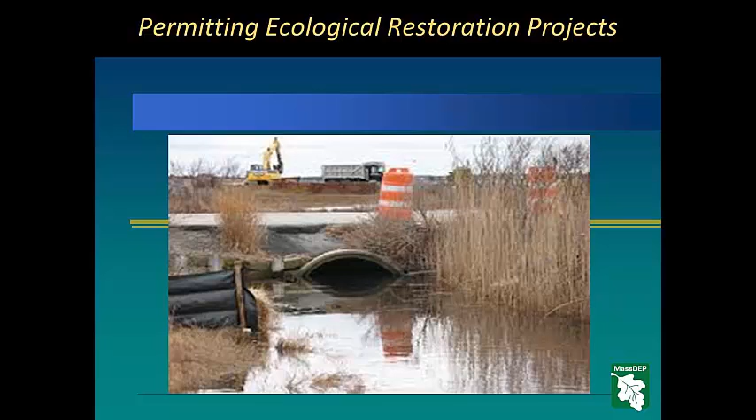Hello and welcome. Massachusetts Department of Environmental Protection is working to develop adaptive strategies to address climate change and integrate them into the Massachusetts Wetlands Protection Act regulatory framework. One such effort is to encourage wetland and restoration projects that further ecological connectedness and resilience, adaptation to sea level rise, and flood and storm damage protection for private property and public infrastructure.

In October of 2014, MassDEP incorporated a general permit into the Wetlands Protection Act regulations that is designed specifically to ensure that restoration projects will be permitted. This presentation explores the regulatory additions implemented for the ecological restoration. It looks at what defines an ecological restoration project and what type of projects can be permitted as ecological restorations. And finally, we will walk through each step of the permitting process as an example.

Several new additions enhance the regulations for ecological restoration projects. There are two new definitions added to 310 CMR 10.04. One is a definition of an ecological restoration project, and the second, a definition for ecological restoration limited projects. We've added 4 new sections for ecological restoration permitting in 310 CMR 10.11 through 310 CMR 10.14. New sections have been added to the coastal and inland limited projects regulations that deal with ecological restoration limited projects specifically. These can be found in 310 CMR 10.24(8) and 310 CMR 10.53(4).

The Wetlands Protection Act regulations now define an ecological restoration project as a project whose primary purpose is to restore or otherwise improve the natural capacity of a resource area to protect and sustain the interests identified in the Wetlands Protection Act when such interests have been degraded or destroyed by anthropogenic influences. Ecological restoration limited projects are those that specifically meet the eligibility criteria outlined in 310 CMR 10.24 Section 8 of the Coastal General Provisions, or the eligibility criteria outlined in 310 CMR 10.53 Section 4 of the Inland General Provisions.

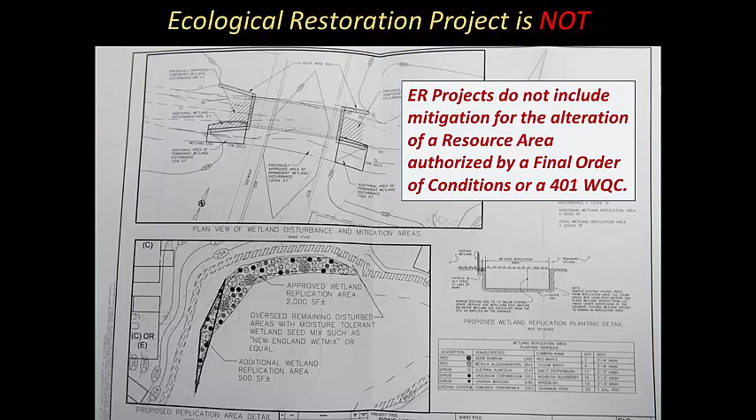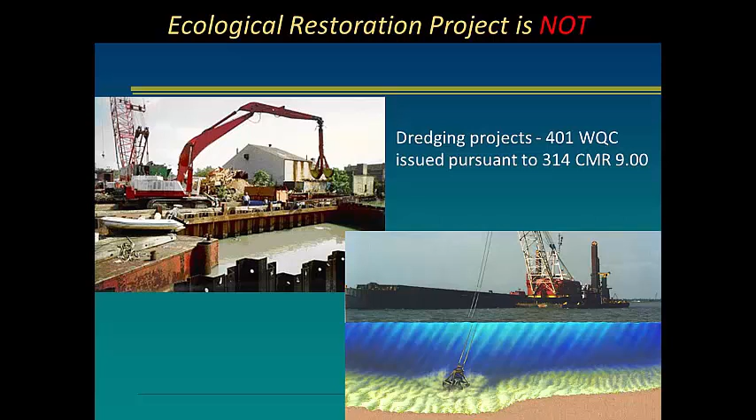Ecological restoration projects do not include mitigation for the alteration of a resource area authorized by a final order of conditions or a 401 water quality certificate. Ecological restoration projects do not include dredging projects for which a 401 water quality certificate has been issued pursuant to 314 CMR 9, unless the project is by definition an ecological restoration. Ecological restoration projects do not include natural disasters or acts of God or enforcement actions requiring restoration.

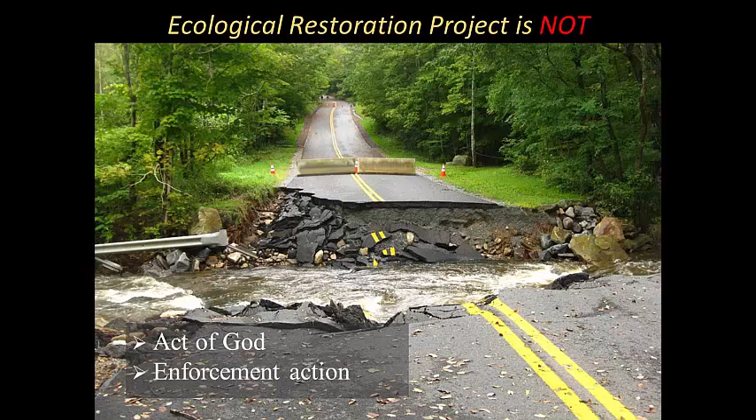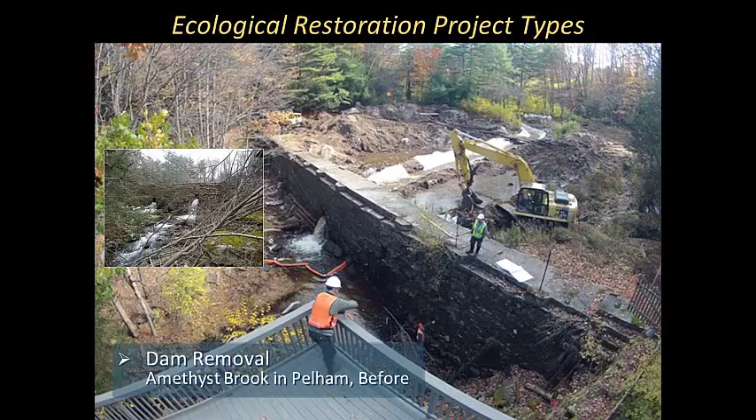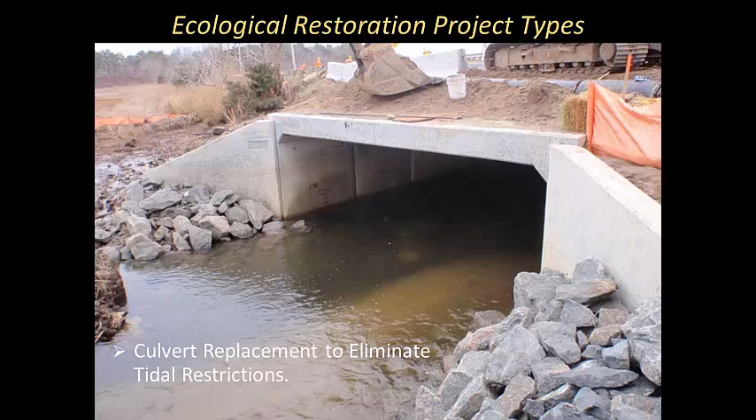There are several advantages for a wetland permit applicant to obtain an ecological restoration general permit. The Ecological Restoration General Permit, also known as the Restoration Order of Conditions, provides advantages for both conservation commissions and wetland permit applicants. For example, the general permit is a faster and more predictable permitting process because it identifies key issues for review, is front-loaded so all necessary information is already included with the notice of intent at the time of submittal to the Conservation Commission. It doesn't require a 401 water quality certification unless the project involves dredging. The restoration order of conditions also includes standard template conditions for each of the specific ecological restoration project types.

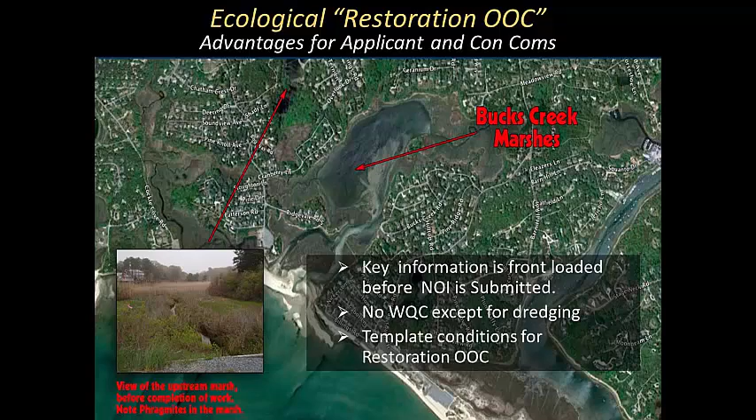Another advantage of applying for an ecological restoration general permit includes an exemption from Massachusetts Environmental Policy Act, or MEPA review, unless they are publicly funded. However, a notice still needs to be published in the Environmental Monitor before submitting the Notice of Intent to the Conservation Commission. Ecological restoration projects that meet the requirements of 310 CMR 10.12(1) and (2) are exempt from conducting a wildlife habitat evaluation under 310 CMR 10.60.

It's important to note that there is an underlying principle for ecological restoration projects. It is understood that these kinds of projects may result in the temporary or permanent loss of a resource area or the conversion of one resource area to another resource type when that loss is fundamentally necessary to achieve the project's ecological restoration goals.

We've developed a flowchart for the ecological restoration permitting process to emphasize its structure. The visual outline that a flowchart provides can help to clarify our understanding of the permitting process for restoration order of conditions and for ecological restoration limited projects. We'll use the flowchart to walk through each step of an NOI filing.

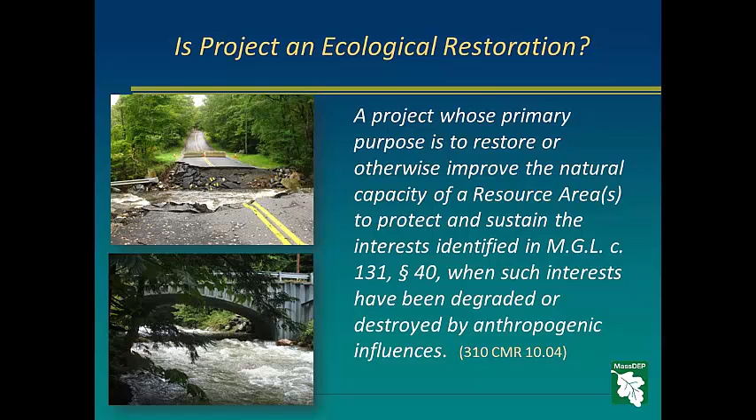First, to determine which permitting process a notice of intent should follow, the applicant must first decide if the project is an ecological restoration. This question can be answered by comparing the project to the regulatory definition found in 310 CMR 10.04, which defines an ecological restoration as a project whose primary purpose is to restore or otherwise improve the natural capacity of a resource area to protect and sustain the interests identified in the Wetlands Protection Act when such interests have been degraded or destroyed by anthropogenic influences. If the project does not meet the definition of an ecological restoration project, as defined in 310 CMR 10.04, then the NOI is a regular wetland filing and not an ecological restoration project.

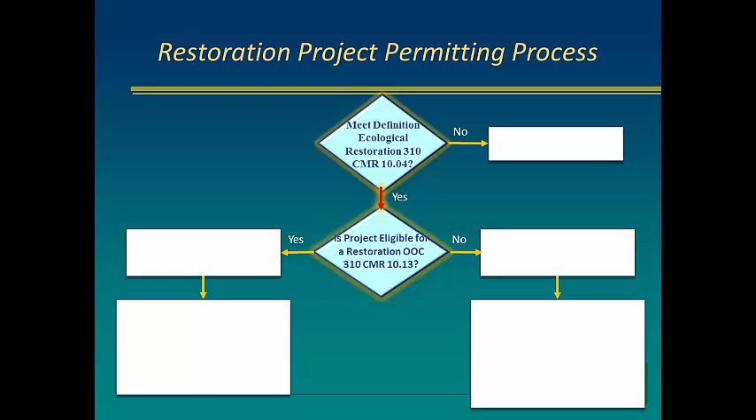In that case, the applicant should file the Notice of Intent using the regular WPA Form 3 Notice of Intent. If the project meets the regulatory definition of an ecological restoration, then the NOI is an ecological restoration project. The next step in the permitting process is to determine if the ecological restoration project is eligible for a restoration order of conditions or whether it can be permitted as an ecological restoration limited project.

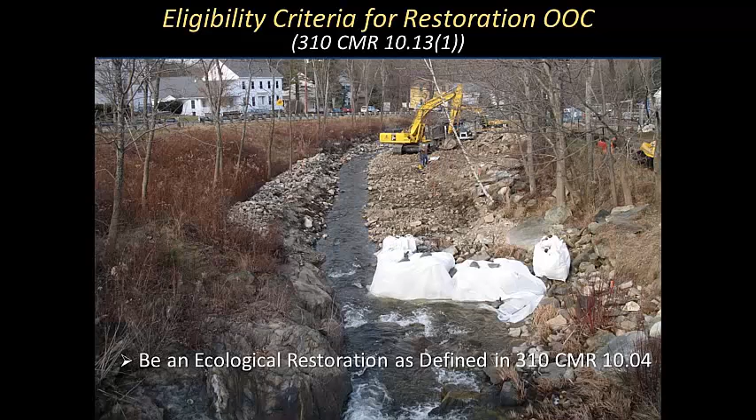So what criteria allow the project to be eligible for a restoration order of conditions? First, the project must be an ecological restoration project as defined in 310 CMR 10.04 as we've just discussed. It must further at least one of the interests of the Act. To the maximum extent practicable, the project must avoid and minimize adverse impacts to resource areas and other interests of the Act, and use erosion and siltation control best management practices to minimize construction impacts.

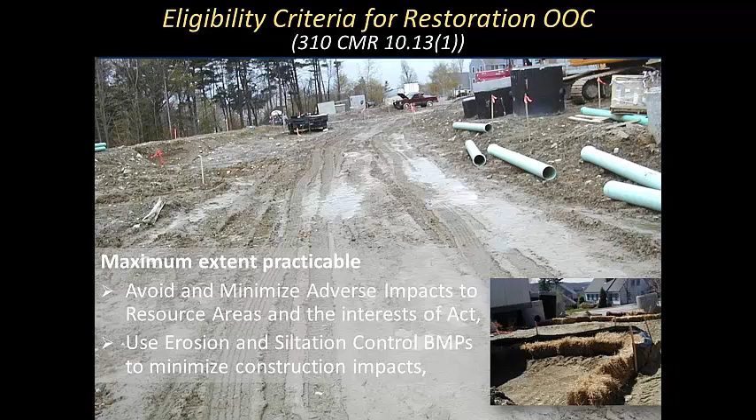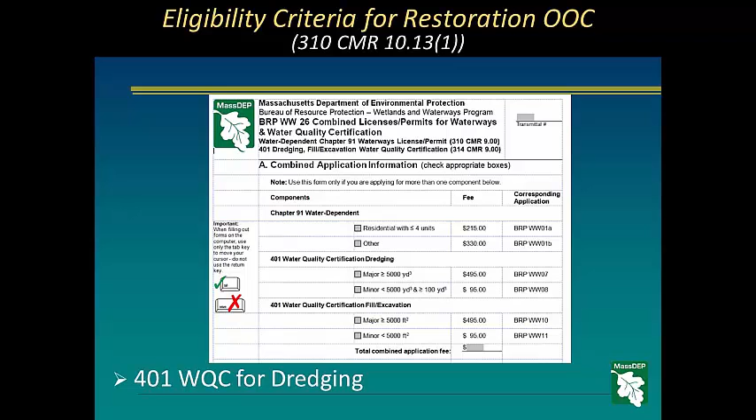The project will not result in a significant increase in flooding or storm damage affecting buildings, wells, septic systems, roads, and man-made structures or infrastructure. If the project involves dredging of 100 cubic yards of sediment or more, or dredging in outstanding resource water, the applicant must obtain a 401 water quality certification pursuant to 314 CMR 9.00.

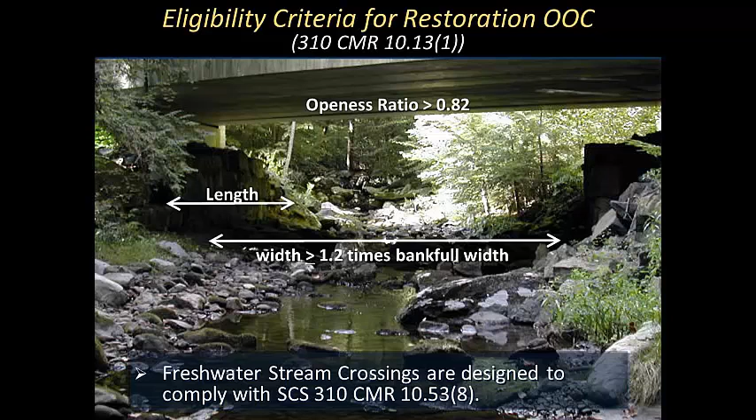The project will not substantially reduce the capacity of a resource area to serve habitat functions if carried out according to time-of-year restrictions and conditions on the project from the Division of Marine Fisheries for coastal waters and from the Division of Fisheries and Wildlife for inland waters. If the project is a freshwater stream crossing, it must be designed to meet the stream crossing standards. Tidal crossings must be designed to eliminate tidal restrictions to the maximum extent practicable. See 310 CMR 10.24 Section 10 for more details.

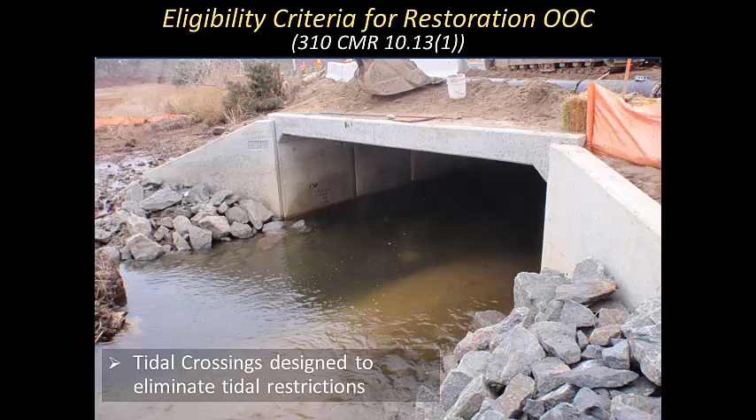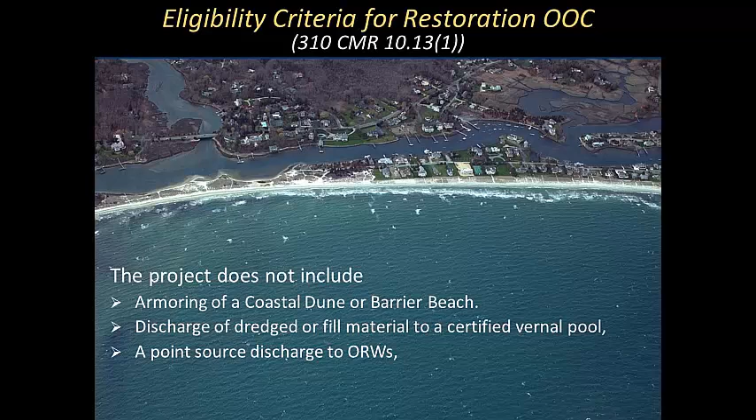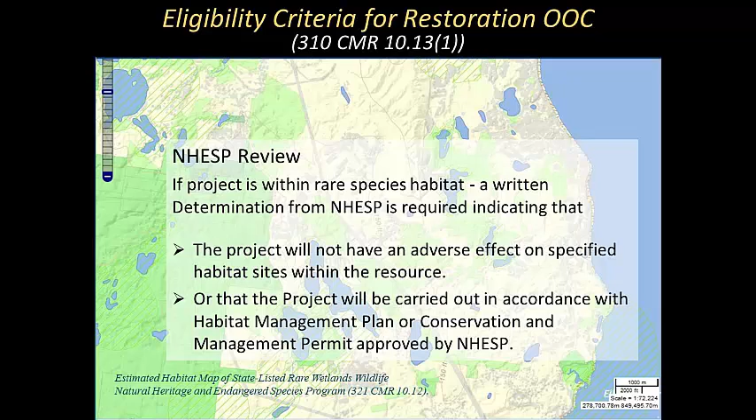The project does not include armoring of a coastal dune or barrier beach, a discharge of dredged or fill material to a certified vernal pool, or a point source discharge to an outstanding resource water. If the project is within rare wetland wildlife habitat, a written determination from the Natural Heritage and Endangered Species Program is required, indicating that either 1, the project will not have an adverse effect on specified habitat sites within the resource, or 2, that the project will be carried out in accordance with the Habitat Management Plan or Conservation and Management Permit approved by Natural Heritage.

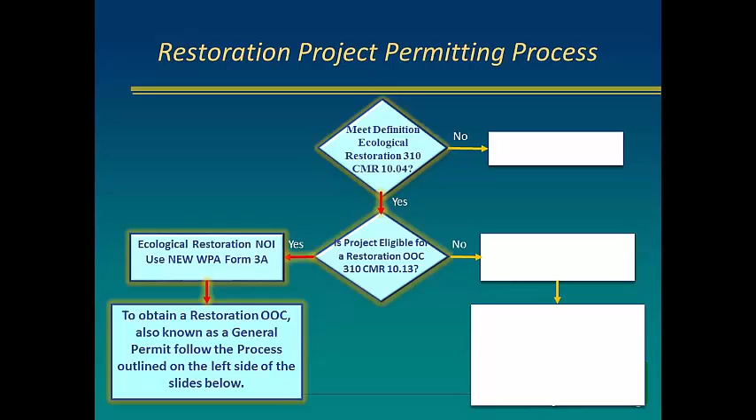If the project meets the definition for an ecological restoration project, and after reviewing the eligibility criteria in 310 CMR 10.13, we find that the project meets all of the criteria required for a restoration order of conditions, then the applicant, 1, would use the new Wetlands Protection Act Form 3A Notice of Intent to obtain a restoration order of conditions, also known as the general permit, and 2, follow the process outlined on the left side of the restoration flowchart and on the slides below.

If the project meets the definition for an ecological restoration project, and after reviewing the eligibility criteria in 310 CMR 10.13, the applicant finds that the project does not meet all of the criteria required for a restoration order of conditions, then the ecological restoration project may still be permitted as an ecological restoration limited project. In that case, the applicant would, 1, use the regular Wetlands Protection Act Form 3 Notice of Intent, and follow the detailed permitting process on the right side of the flowchart and slides below.

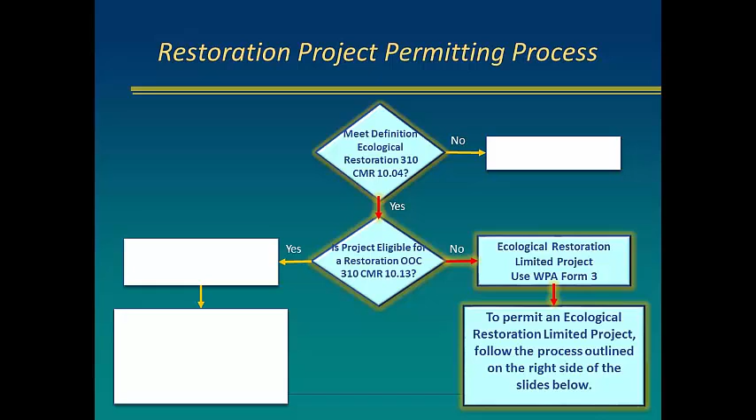This is the new WPA Form 3A, Notice of Intent, that should be used to file for a restoration order of conditions. This new form was designed using checklists that mirror the actions required in the regulations for restoration general permit projects. After identifying the correct form to file, projects eligible for a restoration order of conditions must complete the Ecological Restoration Project description in WPA Form 3A, Section C. This section includes a checkbox for each eligibility criteria listed in 310 CMR 10.13 as part of the project description, and sign the certification of eligibility in Section G.

Projects that do not meet all the eligibility criteria required for restoration order of conditions may still be permitted as an ER limited project. In this case, the applicant should use WPA Form 3, Notice of Intent, and complete WPA Form 3, Section A7B. Then, as indicated in Section A7B, complete the ER Limited Project checklist in Appendix A. And on Appendix A, page 16, sign the certification of eligibility for ER Limited Projects.

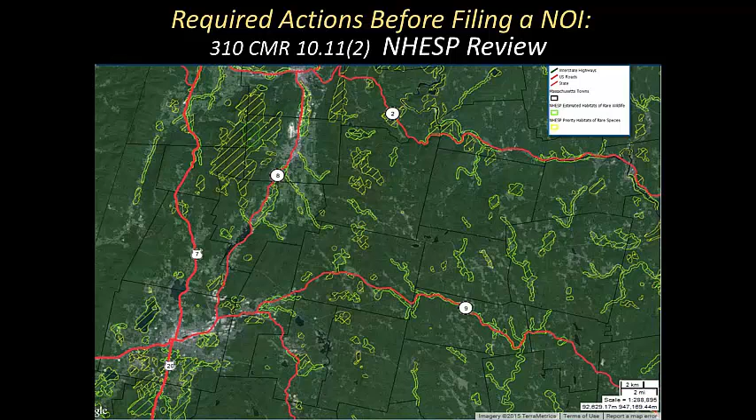If the project will occur within a coastal water body with a restricted time of year, as identified in Appendix B of the Division of Marine Fisheries Technical Report TR 47, entitled Marine Fisheries Time of Year Restrictions for Coastal Alteration Projects, dated April 2011, the applicant shall obtain a written determination from the Division of Marine Fisheries as to whether the proposed work requires a time of year restriction. And if so, the written determination shall specify the recommended time of year restriction and any other recommended conditions on

the proposed work. For a restoration order of conditions, complete Form 3A, Section D, and complete Form 3A, Appendix 1, pages 14 to 18. For a restoration limited project, skip Form 3, Section C, complete Form 3, Appendix A, pages 10 to 14.

If the project may affect a diadromous fish run, as identified in the Division of Marine Fisheries Technical Reports TR 15 through 18, dated 2004, the applicant shall obtain a written determination from the Division of Marine Fisheries as to whether the design specifications and operational plan for the project are compatible with the passage requirements of the fish run.

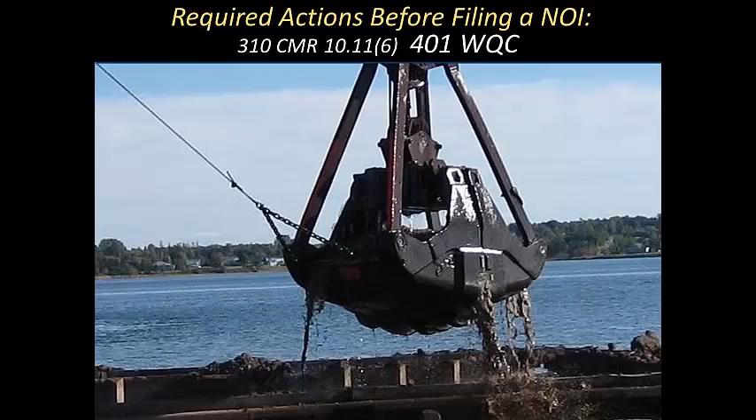If the ecological restoration project involves dredging of 100 cubic yards or more in a resource area, or dredging of any amount in an outstanding resource water, the applicant must obtain a water quality certification pursuant to 314 CMR 9. The applicant must ensure that the project complies with all other applicable limited project provisions of 310 CMR 10.24 or

310 CMR 10.53. For a restoration order of conditions, complete Form 3A, Section D, and complete Form 3A, Appendix 1, pages 14 to 18. And for a restoration limited project, skip Form 3, Section C, complete pages 10 through 14 in Appendix A. Ecological restoration projects are exempt from having to conduct a wildlife habitat evaluation if it meets 310 CMR 10.12, 1 and 2.

Lastly, collect all the documentation required during the process. Attach it all to the Notice of Intent and submit the application package to the Conservation Commission for review. For a Restoration Order of Conditions, complete Form 3A, Section E, pages 11 to 12. Complete Form 3A, Appendix 2, pages 19 and 20. And for an Ecological Restoration Limited Project, skip Form 3, Section D, pages 7 and 8, complete Form 3, Appendix A, pages 14 and 15.

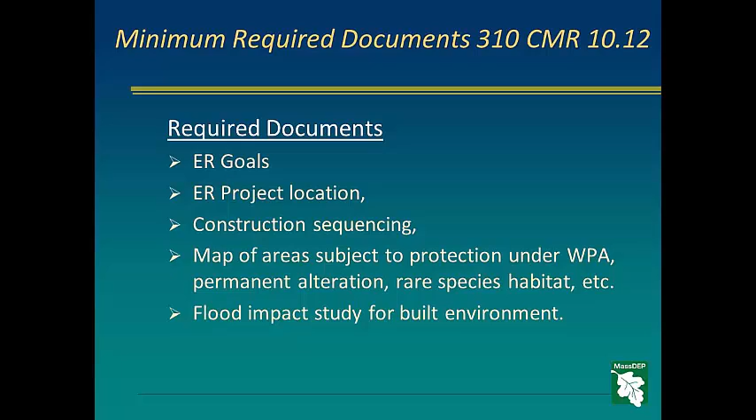The minimum required documents to file with the Notice of Intent is listed in 310 CMR 10.12 and includes the Ecological Restoration Goals, the Ecological Restoration Project location, documentation of the project construction sequencing, maps of permanent alteration, rare species habitat, flood impact study for built environment, plan for controlling invasive species, natural heritage and endangered species written determinations, time of year restrictions or conditions, proof that notice was published in the Environmental Monitor, eligibility criteria certification, operation and maintenance plan for the infrastructure.

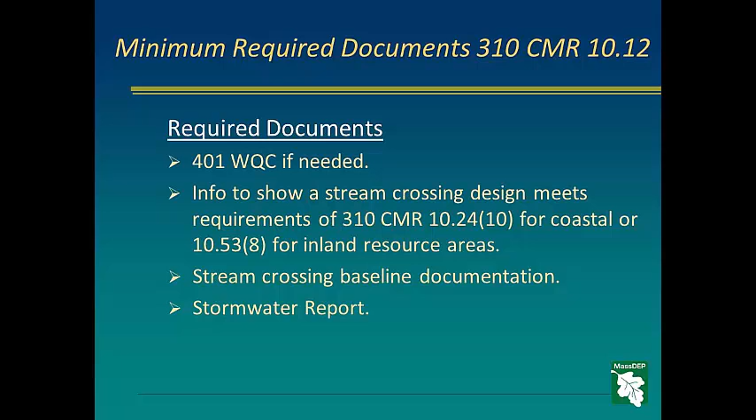The 401 water quality certification, if needed, information to show a stream crossing design meets requirements of 310 CMR 10.24(10) for coastal or 10.53(8) for inland resource areas. Stream crossing baseline documentation. The stormwater report.

For ecological restoration projects that meet all the eligibility requirements in 310 CMR 10.13, the Conservation Commission must issue a Restoration Order of Conditions. The Restoration Order of Conditions is a new form, WPA Form 5A. The Restoration Order of Conditions contains the general conditions 1 to 23 that are common to all orders of conditions and including stormwater. The Restoration Order of Conditions also contains conditions that specifically apply to each ecological restoration project type listed in the regulations.

As with all orders of conditions, there is a section in the form for findings under the Municipal Wetlands Bylaw or Ordinance. However, there are no provisions for conservation commissions to attach special conditions under the State Wetlands Protection Act.

Projects that meet the eligibility criteria set forth in 310 CMR 10.24(8) or 310 CMR 10.53(4) may be permitted as an Ecological Restoration Limited Project. Use WPA Form 5. Unlike the Restoration Order of Conditions, there is no requirement for a Conservation Commission to permit an Ecological Restoration Limited Project. The regulatory language gives Conservation Commissions discretionary authority.